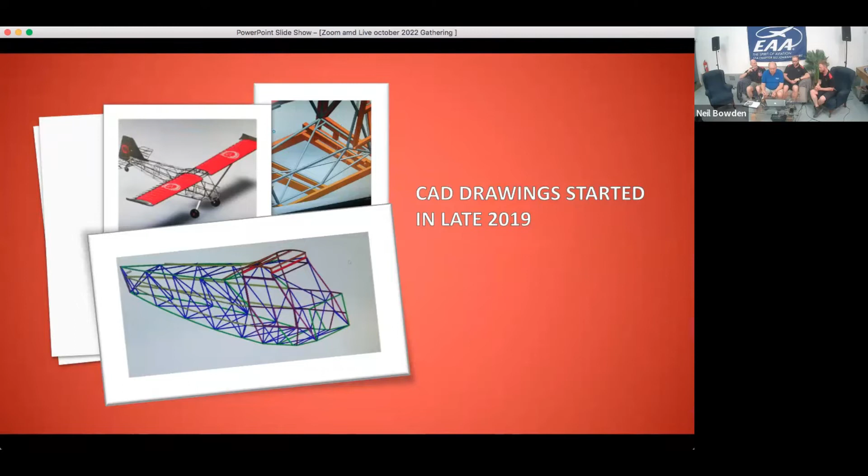So that's part of the end result of the render. You will see very small things like the wingtips.

We hadn't designed the wingtips at this stage, but to go back a little while, the reason for having Aidan Canton with us is very simple. What you're seeing on the screen is what the man can do. So we've used him to do the rendering, to do the CAD drawings, to help us with the design, to come up with various ideas.

And then we've got Dean, who I brought on when we started building in 2020. I've got to say, firstly, both of them, neither Dean nor Aidan had ever built an airplane, and I don't know how much work they've been able to do by hand in the past. But when I said to them, we're going to build an airplane, they said, all right, let's build an airplane. And I don't think they realized exactly what they let themselves in for.

And that's a good thing, because I don't think they'd have been here tonight if I had told them from the beginning. So Dean was put in charge of building a jig. He said, Dad, I can't weld. So I said, by the time we finish the jig, you'll be able to weld. And believe me, he can weld. So I'm very happy that he's joined us, both Aidan and Dean.

I must say, we've only got 3 people in the team at the moment, but it's been amazing what we've been able to learn together, what I've been able to teach them, and even what they've been able to teach me. To be able to build and do things together has been absolutely amazing.

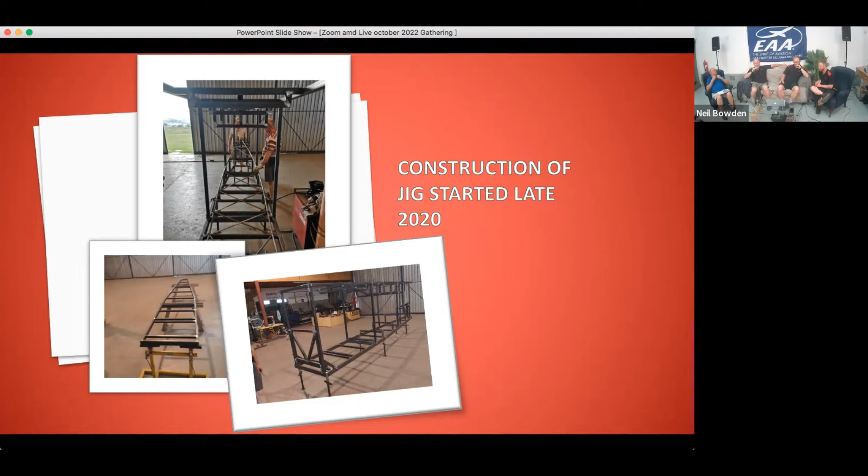We had our drawings obviously to go off of, but it was completely starting from scratch. We started out with a pile of tubes on the floor and we looked at it and thought, well, hang on, what are we doing here? Can you hear at the back there?

So eventually we started forming and actually turning into something. A funny little story about the actual laser cut tubes - we were so close to not actually having anything to do in that December, because when we went to get the parts cut, the company we went to, it was the day that they were closing. We arrived there in the morning. I'd still been sitting with them for about 3 weeks prior, waiting for our parts to arrive, and they just hadn't got to it.

We showed up there on the very day they were supposed to be closing and said, listen guys, we have a deadline to meet, we really need our parts today. We got a few sour faces from the guys working there, but to our great fortune, the owner happened to be there, and he was a pilot himself who flew sling-type aircraft. When he found out what we wanted to do, he forced his employees to stay and help us until they were finished. We probably made one or two enemies that day, but we didn't mind because we got to go home with all our parts laser cut at 6:30 in the evening, so we could spend December starting the build of the Orion.

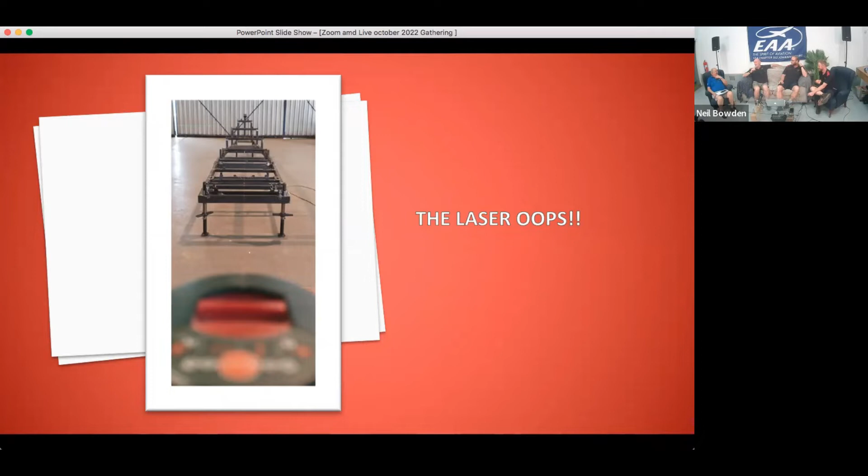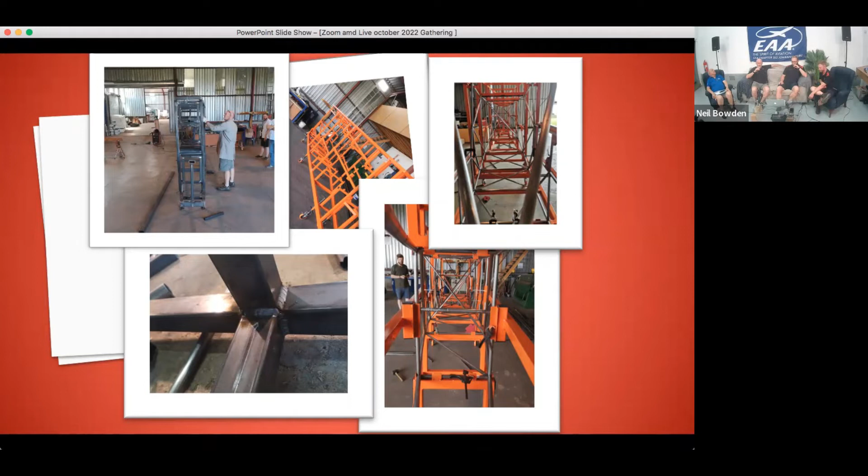So what you're seeing on the screen is the jig. As we were finalizing it, we started populating it. You can see in the bottom right-hand picture where we've got some of the laser cut tubes in the jig, and to our surprise, everything actually fitted. Our Christmas tree that was lying on the floor, which didn't look like it was going to do anything, ended up fitting. Can I ask Carl if we can maybe dim these lights a bit?

It's blurring out, yeah. I'll get Neil to... yeah, that's right, that's better. Oh, thank you, Jim. Okay, you can go on.

So for the first time, we've actually got the entire fuselage within the jig, which you can't really see clearly, but it is inside there. It's for the first time we actually realized, boy, we can build an airplane - we can build a fuselage and actually get it inside the jig. To tell you, the jig is made out of 18 separate pieces.

It's got a bed, it's got a top piece, and the firewall is a separate piece, and there's a whole host of separate pieces. Every little tube, every little piece in there can be removed. You can unclip it and take it apart. So to populate it, we did it so many times that Dean was able to do the entire thing in an hour by himself, from a Christmas tree to an assembled jig.

The first thing I have to say is it's a huge learning curve for me. For many years I've been building and rebuilding airplanes, and it's been fantastic. But to take a fuselage and want to replicate it over and over has been completely different. Everything you do, you have to ask yourself, how can we do this in the quickest and easiest manner, because we're going to replicate this whole thing.

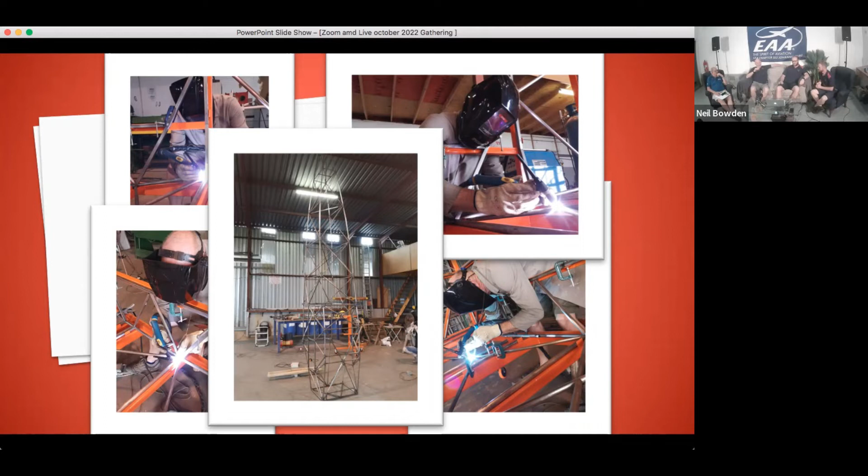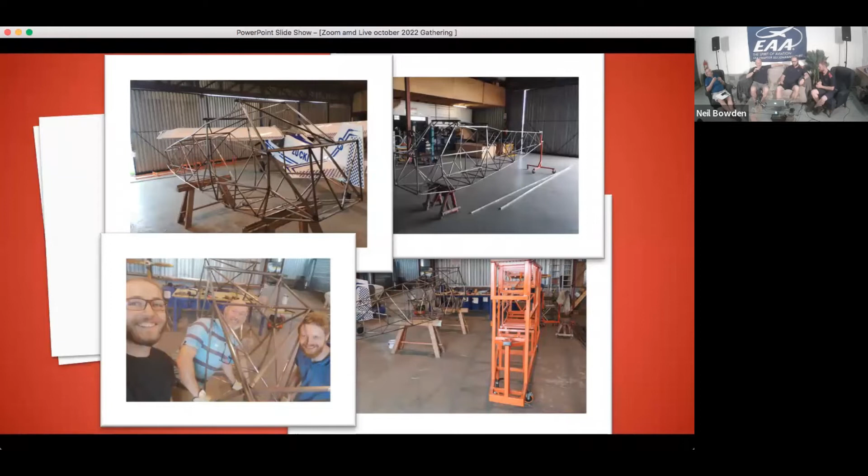There's just a couple of pictures of us in the bottom corner enjoying the moment, having taken this, all the effort we put in, and actually got to a point where we've got a fuselage. For anybody who's built something like this, it's quite amazing. All the effort you put in, and you can stand back and say the plan and what we've got look similar. We won't measure anything, but it's pretty close.

Then there's always milestones. The shirts we're wearing tonight, Dean and Aidan went out and had them made specifically for us. The 3 hats we've got on our heads have signatures on them—the only 3 in the world, there aren't any others.

So the shirts we're wearing now have a little story behind them. Initially Kevin was unaware that we were having the shirts made. Dean and I decided we wanted to give Kevin a bit of a surprise, so we spent 2 or 3 weeks designing them, having them printed and made, then snuck off out of the hangar to fetch them while Kevin was out doing something. We got our window of opportunity, came back, made sure he was there, and put the shirts on before walking in. Kevin stopped us—at first he didn't realize, then he looked again and said, hang on, isn't that our logo on your shirt? I said yes it is. He said, where did you get those shirts from? I said, no man, what are you talking about, we've had them for ages. We thought it was a nice little joke to rip on Kevin a bit, and then gave him his shirt. That's actually when we took that picture.

Oh yes, so if I can just, that is our... well, I don't know how many of you guys can actually read what is on the shirt. This is kind of the company slogan at the moment.

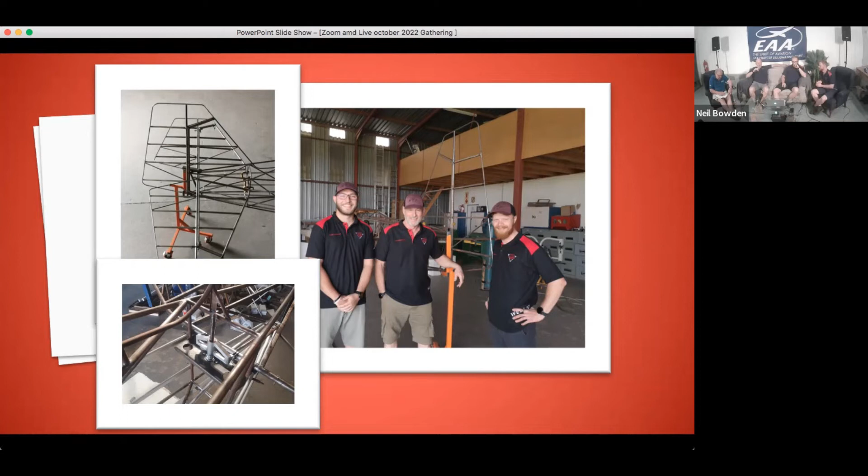What we did was basically break the program, or the build, into various parts: the jigs, the tail section, the wings, because all of my experience said never try to build an aeroplane. That's what I tried to express to Dean and Aidan from the beginning. Don't build an aeroplane, build components, and stand back and say, I built a tail or I built an aileron. In our case, we built the jig, we built molds, we built the tail, we built absolutely everything. But to keep us going, we'd break it down and ask what we were going to achieve by the end of the week or the end of the day.

It's been, not everybody has always agreed. Dean doesn't agree with our paint scheme. Aidan doesn't like it when I say to him, well, let's redraw the fuselage. But I've already done it 8 times. Well, the 9th time will be fine. Let's get it right, hopefully. He's not exaggerating, by the way, and it's not an exaggeration.

We've now, as of today, done 11 renditions of our fuselage. And we start afresh each time, we don't add to it, we don't take away from it. We start completely afresh. So when Aidan gets a bit, what do you call it, miffed, then we know we're going in the right direction. But everything we've done, we've tried on, as you see us sitting in the fuselage to check that everything fits.

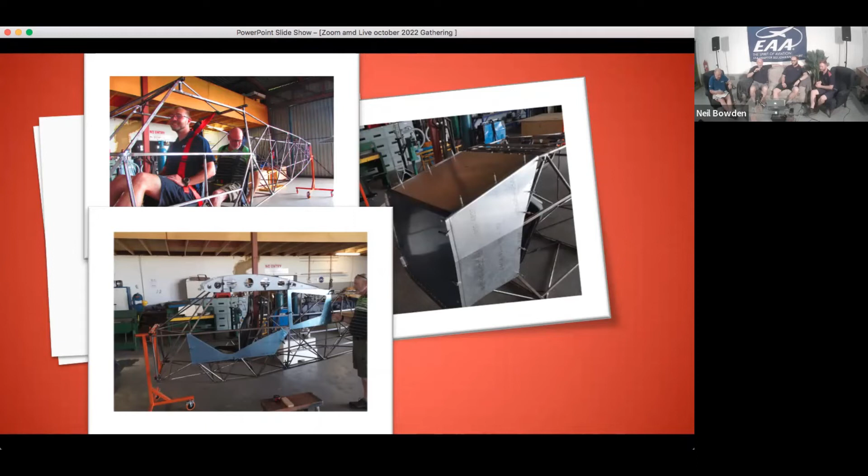We've downloaded little models of people so we could put them in the fuselage to see how they fit. We've tried to make it very basic, the basic aeroplane, and that's what we're trying to achieve. Everything is as basic as possible. It's a space frame, and we've used aluminium for covering, pretty much the same as what any other airplane manufacturer was doing at the time. The only difference is we did everything with a router or a CNC machine.

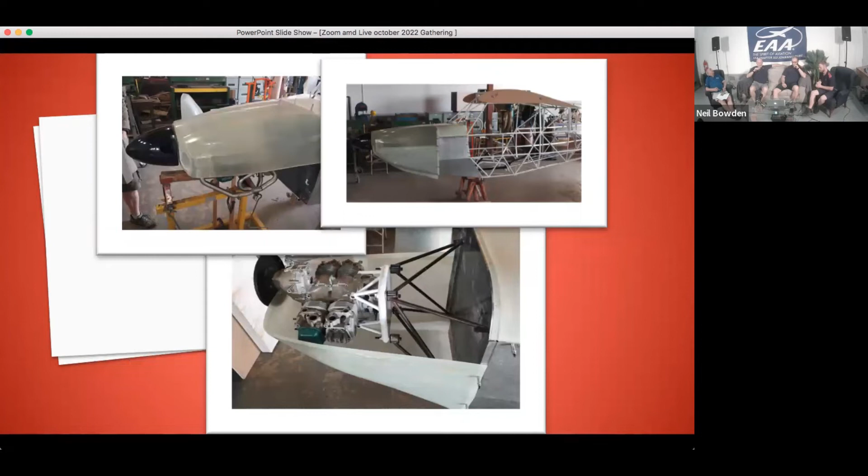Here we can see the beginnings of the engine mount. You can see how bare the engine is at the moment. We had to make the mount come out in the center of the cowling. We put in 1.2 degrees of down thrust and 1.2 degrees of right thrust, so the engine is sitting off center, which makes it a lot more difficult to get everything right. The engine, the cowling, everything is completely skewed. If you take the cowling and put it on the ground, the top is no longer square. Everything is skewed, so it just makes it more difficult.

We thought, well, let's rise to the challenge, and I'm pleased to say we have. We even went as far as having a custom exhaust pipe made, a tuned length exhaust. Everything we do, we've tried to do so we can replicate it. So we went to the guys in Pretoria, De Graaf, and said, make an exhaust pipe, but don't just make an exhaust pipe, we want a jig so we can replicate it. So everything here can be replicated, from the molds of the seats, which you'll see next, which are carbon fiber. We made the molds. We've done absolutely everything to replicate it.

Now, if anybody's looked inside of Derek Fresca's radial rocket, you'll see that seat. While we were making the mold, Derek needed a seat, so I said to him one Saturday, well, let's have a look and see if this fits in there. And the next thing I had to do is make 2 more seats because I didn't have them — they were in the radial rocket.

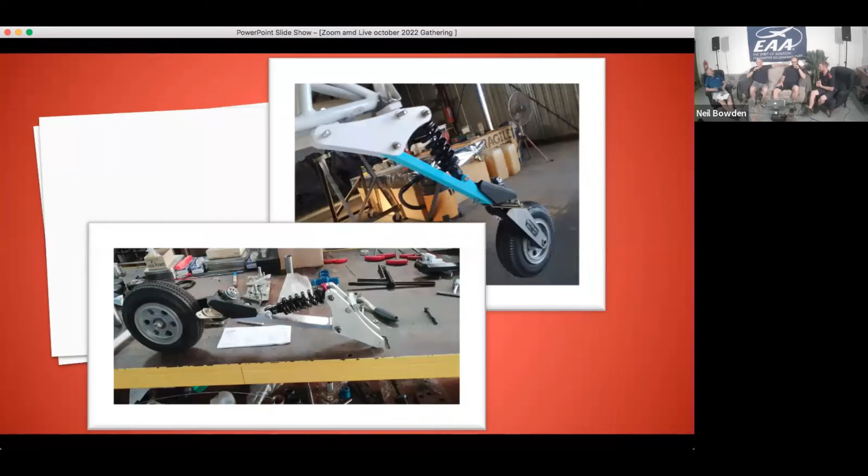Beautiful. We also used a lot of 3D printed parts. So that tail wheel you see there is a 3D printed part from the drawings that Aidan's made us. The reason for it was that machining a piece of aluminium into that shape is costly, while using a 3D printer makes it very cheap, and within a day you've got all your parts. You can see that everything fits, you can check how well it works, all the hole sizes, everything is there, so it becomes rather easy.

And we decided to put a shock absorber in the tail, and that shock absorber is also a little bit more special than just a standard shock. It's got what they call rebound damping, so we can adjust the amount of rebound, whether the tail wheel hitting the ground shoots it back up or absorbs the energy. And it's amazing, you can drop the airplane from about 1 meter high, and it doesn't bounce, it just hits the ground and stays right there.

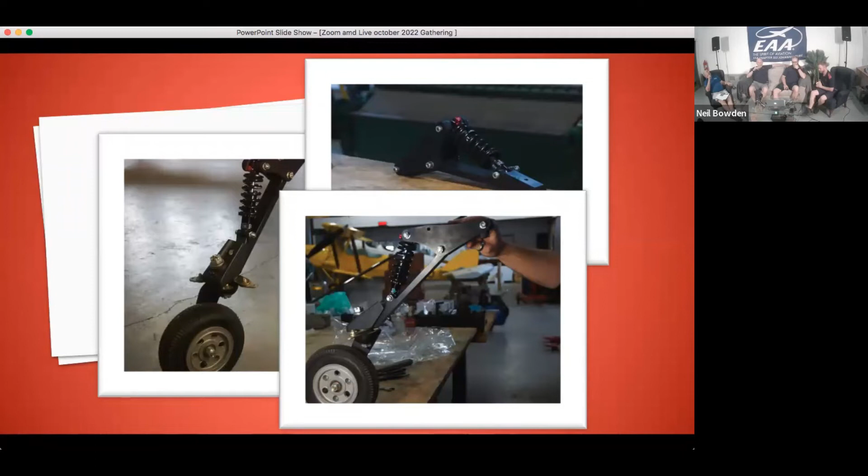And we've followed that on by making shock absorbers for the main gear in the same vein, so we've got 2 huge big shock absorbers with oil damping. It's got springs on the inside, and it's well damped, so it absorbs all the bounces you can give it. Dale de Klerk, who's done all the test flying, has tried really hard to bounce the airplane, and the most I could see was about 3 inches, and that was it. He just says, I can't get it to bounce, which is pretty good.

The covering — we started doing covering, that was another thing I was teaching Dean and Aidan. They have never done covering, you must remember, they've never built an airplane, they've never done anything like this in their life. And then they tried to teach me how to do it, which was quite fun. I said, guys, you'll see this when it's painted. No, they said, paint will cover that. Well, now I've got 2 guys standing back saying, I wish I'd fixed that. So they've learned a bit, and we know the next one will be even better. They've done a brilliant job. For guys who have never done anything, they've done an absolutely amazing job. They have learned a lot, and we've had a lot of fun.

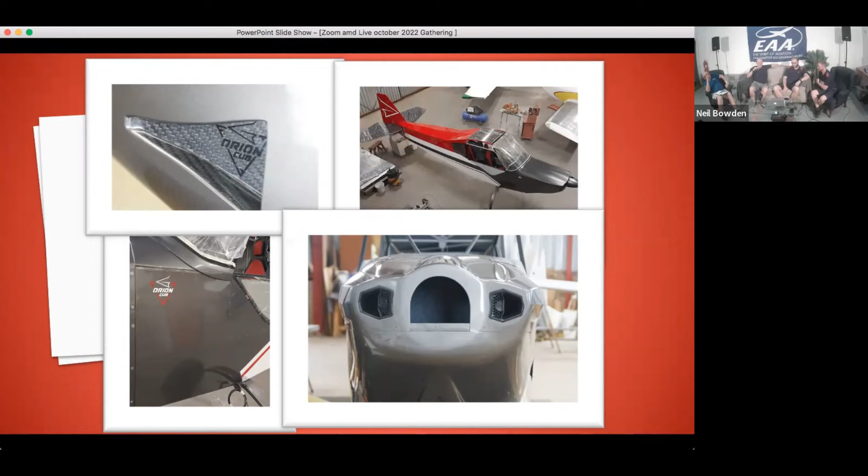Everything that we've done is obviously for us as the designers, it's pleasing, but we've got so many people pleased by what they see in terms of the shape. So it's really, really satisfying for us.

There's a number of parts. Another one of Dean's job descriptions is turning things on the lathe - he doesn't know how, is what he told me. Well, I see some damn fine parts, and they're all there. We've machined the yoke for the trim screw at the back. We've got an electrically operated trim jack, which operates the entire stabilizer, moving it up and down - that is our trim.

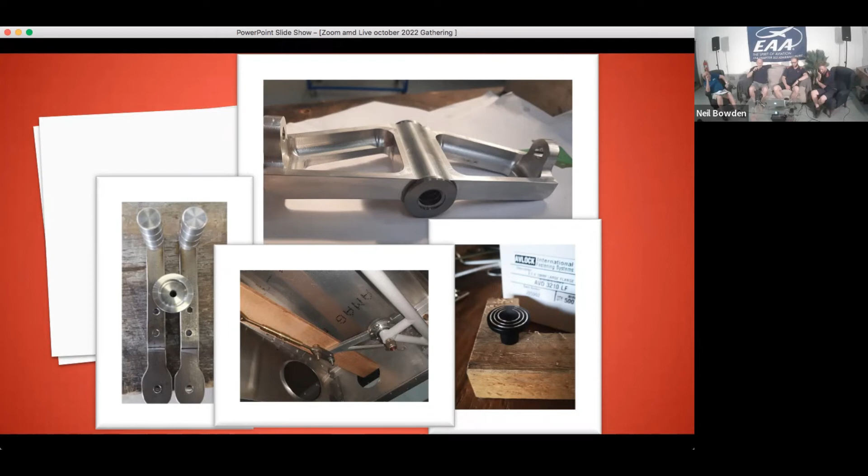Then in the wing, we've got bell cranks, and every single piece has been machined out of billet. That's our pedal, again a billet machined thing. That's not a rendering - that's actually a photograph of what our pedals look like. So if you look in the aeroplane, that's what you'll see: a little aluminum pedal made out of a solid billet.

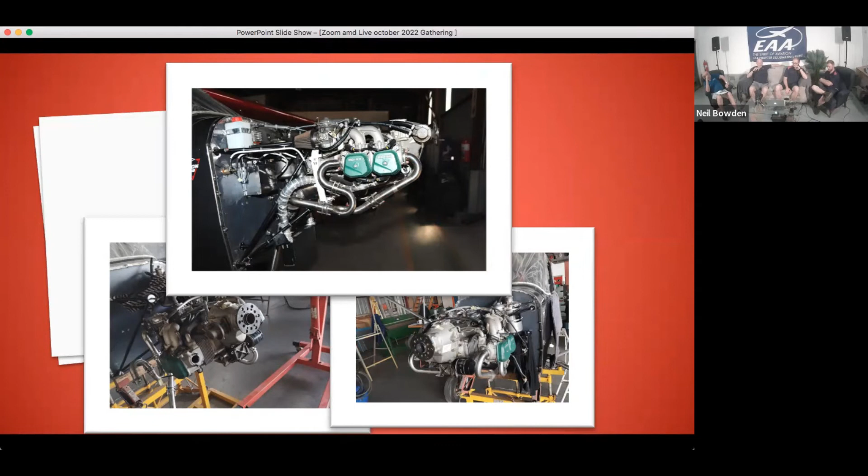Engine installation - basic standard Rotax with our custom exhaust. You can actually see the shape coming from around the cowling, and to fit everything in it looks a little bit more populated than earlier on when we had the engine in on its own. We wondered what we were going to do with all the space, and after we started doing the final assembly, we were wondering if we had enough space for everything.

The good part about it is we've designed on CAD - we've got solid models of this engine, which is a 912. We've got solid models of the 915, and solid models of a 914 turbo, and every single one of those can fit within our cowling. That's the beauty of doing CAD drawings and solid models.

Our instrument panel is also slightly different to the norm - it's not just a flat panel. We've chosen to go bold colors simply because I believe the airplane's meant to be fun. We want people who, instead of playing golf on a Wednesday afternoon, want to go out flying. So what we're doing is saying, well, let's go and have fun. Let's put all the fun in, and that's why we went for the carbon fiber seats and the fancy little upholstery. We wanted it to be fun.

But we've also done one thing else - instead of having a completely flat panel, we've allowed the panel to optically be the same distance from your eye, whether you're looking at the left, the right, or even in the center. So our panel is slightly curved - although it's flat, it's curved. It's actually given us a lot more space, so the big gap in the middle would be for either your iPad, as we're using it now, or a 10-inch touchscreen EFIS.

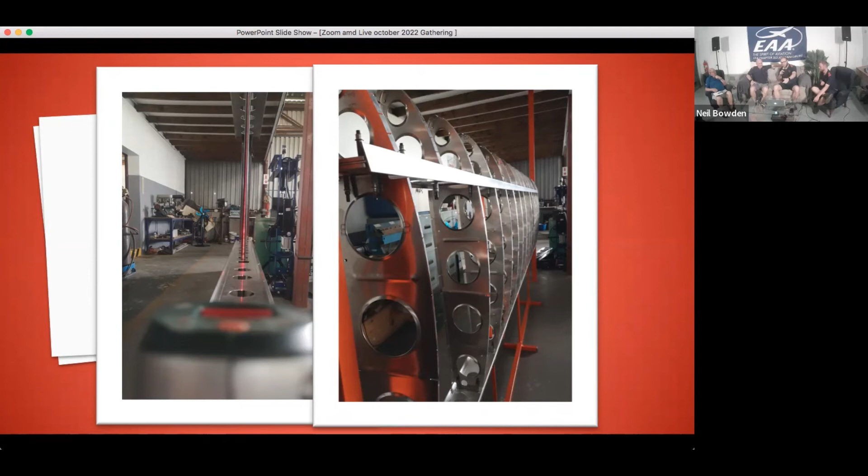What that does is, because your bottom spar is now level, your top spar with those spacers is also now level, so it could also ensure hands-off flight.

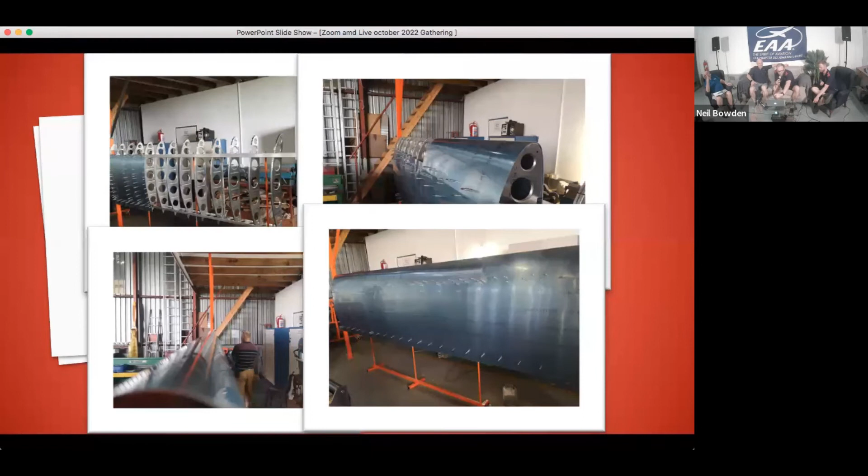So here in the top left-hand corner, those little orange pieces between the two spars are the spacers that keep all your ribs in the middle equally spaced, and it doesn't bow your spar.

As you can see, top right-hand corner, it doesn't take a lot of experience to actually put the wing together. The aeroplane is still flying with me having riveted the whole thing together, so no experience needed on the riveting side.

Within 2 weeks, if you have a dimpled skin, you can have a full set of wings. If you want to, you could actually have the polished finish, but that is a lot of work. I know. Cole would know, and it's just a lot of upkeep.

But the reason we went for the dimpled skin was not for speed. If anything, we'd probably gain a quarter of a knot, a quarter of a mile an hour with the dimpled skin as opposed to the raised head rivets. But with the dimpled skin, as my dad has told us numerous times, you actually have to pick the two skins up out of each other before the rivet can shear. To lift those two skins out of each other is actually quite impossible once they've been riveted together, which also then creates a much stronger wing because your skins are held so much stronger together.

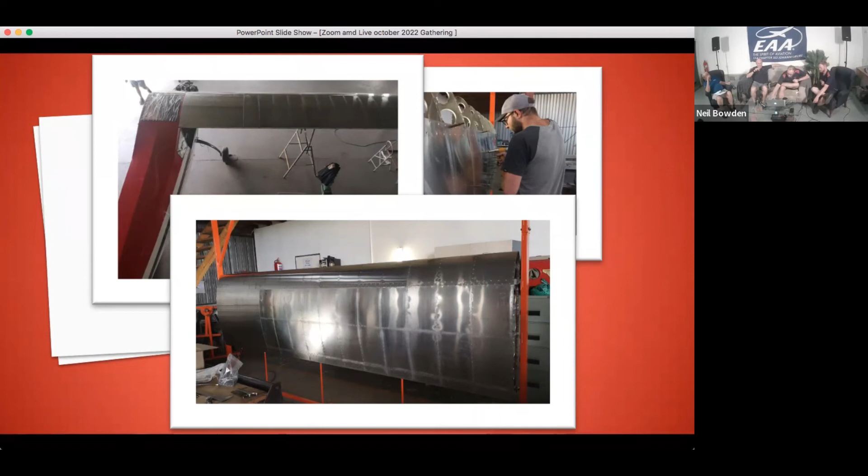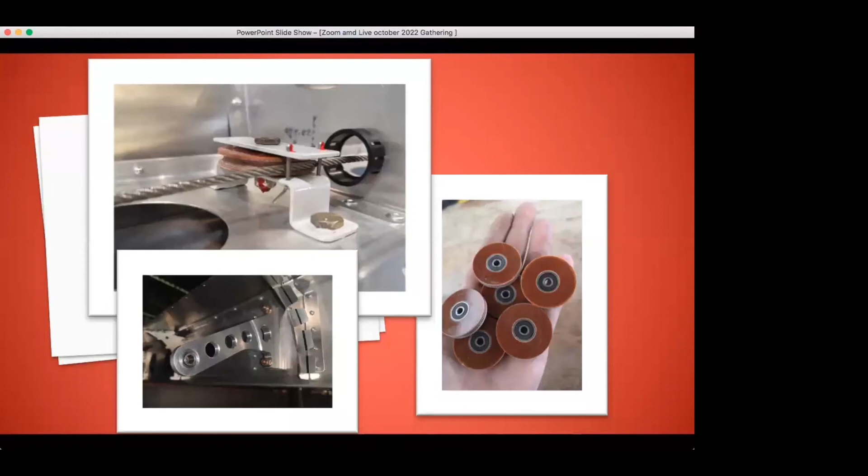The left-hand bottom corner is a typical example of a flat hinge, and at the top is what it would look like once assembled and finally finished. Snap bushings, which are supplied in the kit, cables, everything. We just put two simple little split pins which allow it to act as a keeper for the cable.

We built ourselves, if you saw the leading edge as well, a jig that actually radiuses the spars and the leading edge skins for the ailerons and the flaps.

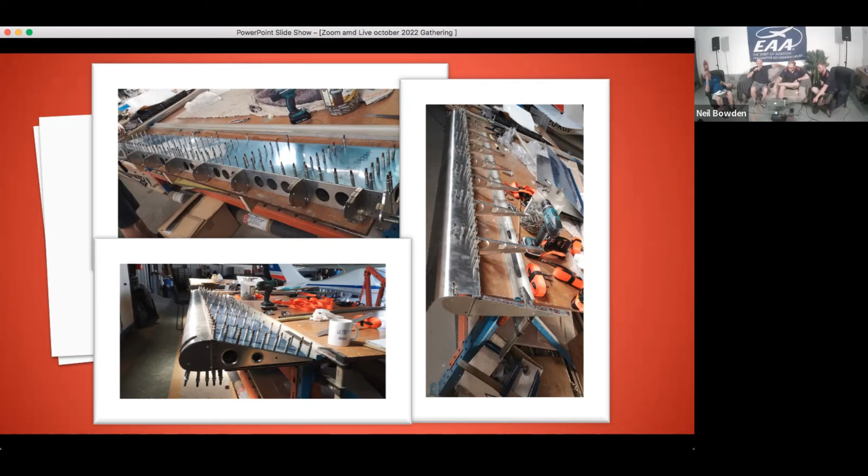That is a 9-day operation. That, what you're seeing there, is our flap mechanism, and to get that to do what it's doing took us 9 days. Dean says 11, and it's probably more right.

So we've got indents at 15, 30, 45, and the big boy flaps are 60 degrees at the end. We've actually used them once, and we don't think we've got enough power to actually warrant having that much flap at 60 degrees.

It's always daunting, but we've chosen to have flaps which are longer than our ailerons, and so they're slightly longer than half span of the wing.